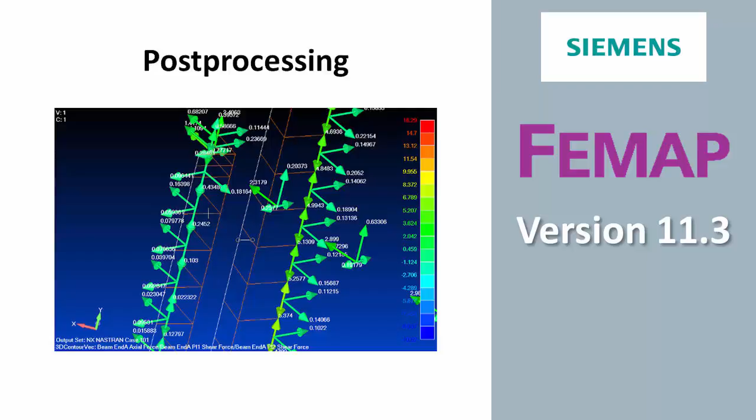Welcome to the Femap version 11.3 What's New video series.

Post-processing. We did a complete overhaul of what we now call our arrow plots. They used to be called contour vector plots, which was kind of confusing because we had contour plots and we had data output vectors. They really didn't have anything to do with each other. We were making arrows, so we now call them arrow plots.

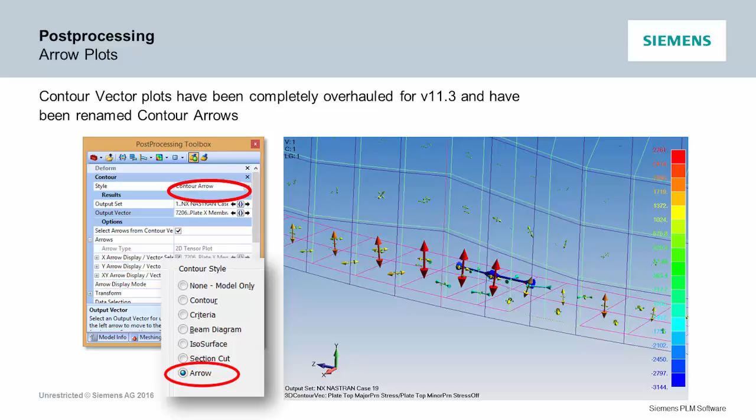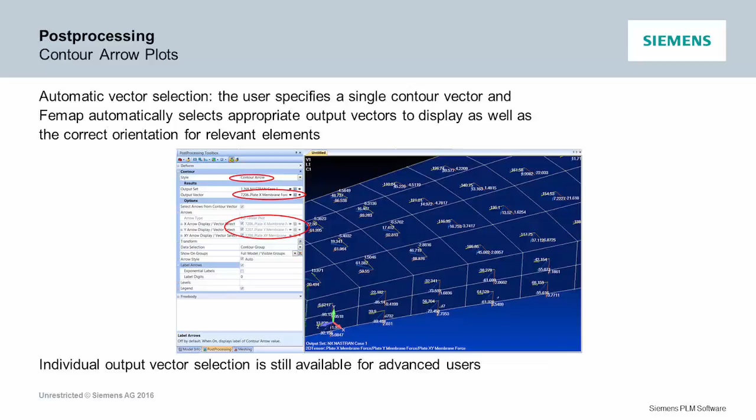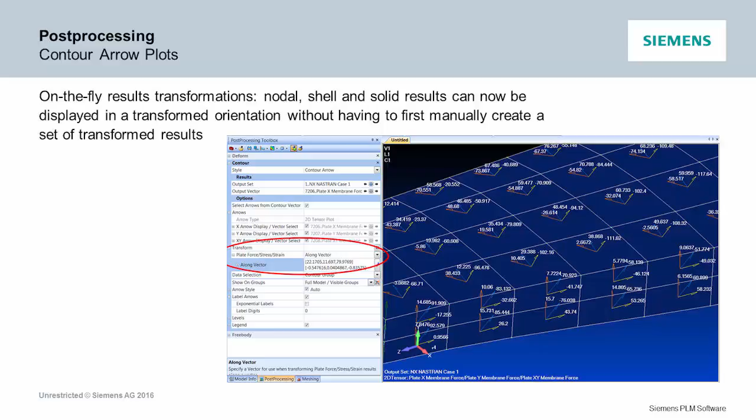And we set this up so that when you pick membrane forces, when you pick X, Y, or shear, it automatically goes and gets the other components and plots them at one time. It just does it for you. Don't worry about it. If you then press the transform button, it just transforms them. You don't have to go set up a bunch of stuff. It's so easy now to make a force plot, transform it in any coordinate system, see it on screen. It changes the arrows to something that makes sense.

It does the same thing if you're plotting principal stresses. It automatically switches to center arrows. It shows tension and compression. You can see what direction they are. And if you pick major stresses, it automatically picks the minor stress. But if you want to turn one of them off, you just turn it off and you'll see one at a time.

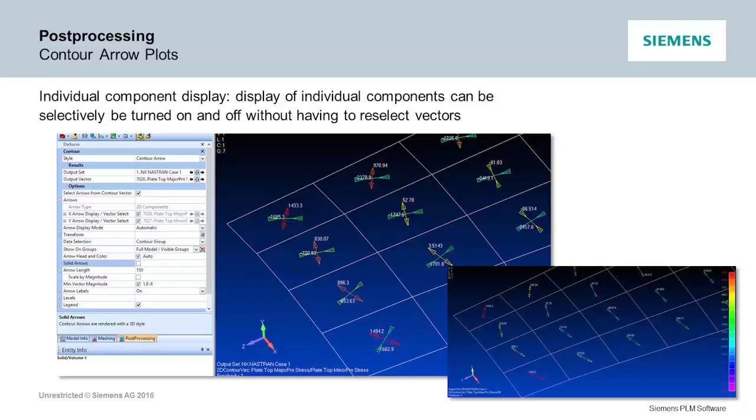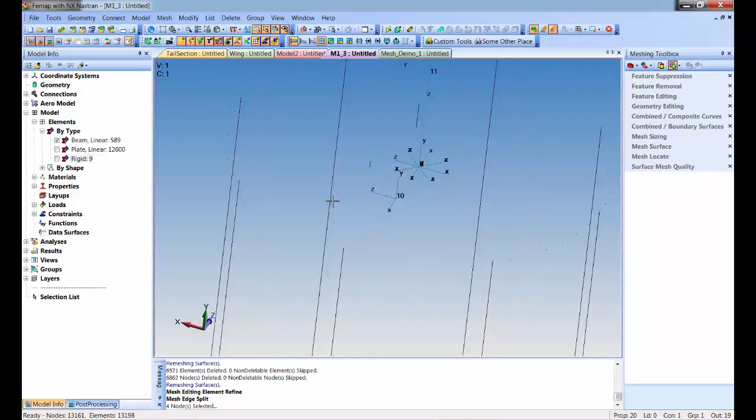There's also solid arrows if you want to make it look pretty, but those are options, and they do look pretty nice. It kind of demos better than it shows. Let's just do some beam ones real quick. I'm going to shut off everything but my beam elements in this model. You can barely see them, there's little stiffeners running vertically, but there's little fasteners running this way.

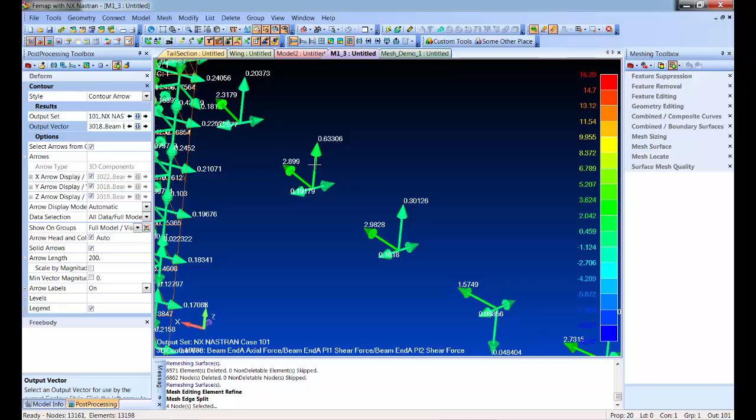So if I go into the arrow plot and pick shear force on a beam, it automatically goes and draws all my beams. So you'll see tension on that little fastener. Here's its shear components. And the bigger one, same thing. You'll see tension and shear. Another nice thing you can do in here: I know that shear is YZ. I can combine those at the same time into their total shear without having to do any output calculations.

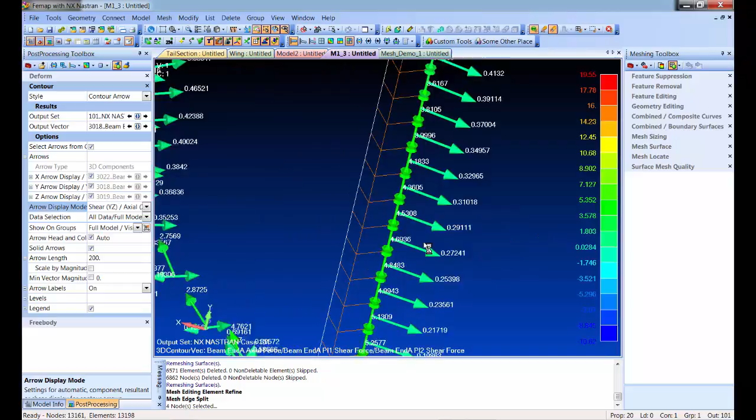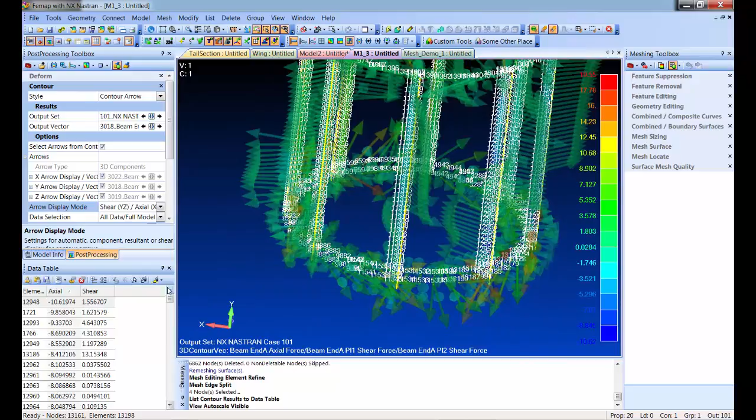And just like everything else in Femap, I'm going to turn on my data table and say list output contoured results to the data table, and now I can sort. And if I turn on the highlighter and highlight, it'll show me the highest axial force in the model in this case.

Or if I change this to shear, I can go find the highest shear value is right here on this element. So it shows me the element ID. I can see the max shear. I can quickly tell what's the highest shear load in a fastener in this entire thing right here.

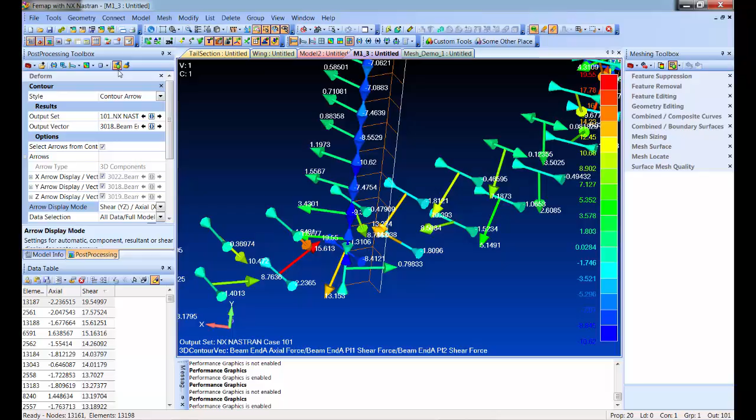I'm running in performance graphics right now, and performance graphics is a little better because it draws the little arrows faster. That's all taken care of. A lot of things, if we can't draw it in performance graphics now, internally it falls through and draws it with the old graphics. So you can pretty much stay in performance graphics right now.

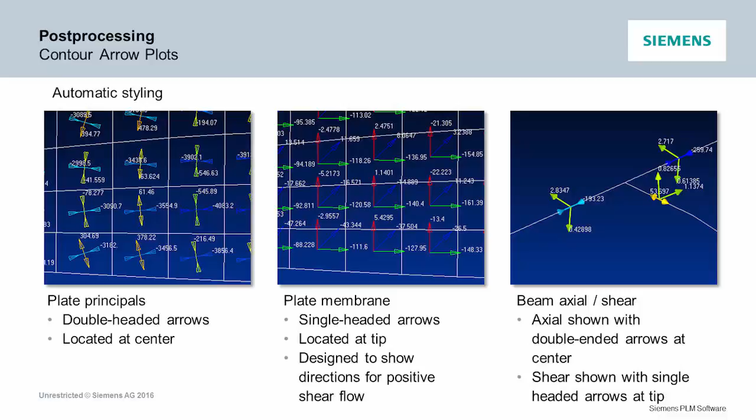Beams you saw, but this also works for bushings. So if you've got a bunch of CBUSHes, you can now see the forces in the CBUSH at the same time. And even simple displacements will draw with these new arrows, and then you can transform or do whatever you want. And we saw the listings, you can do the sorting and all that.

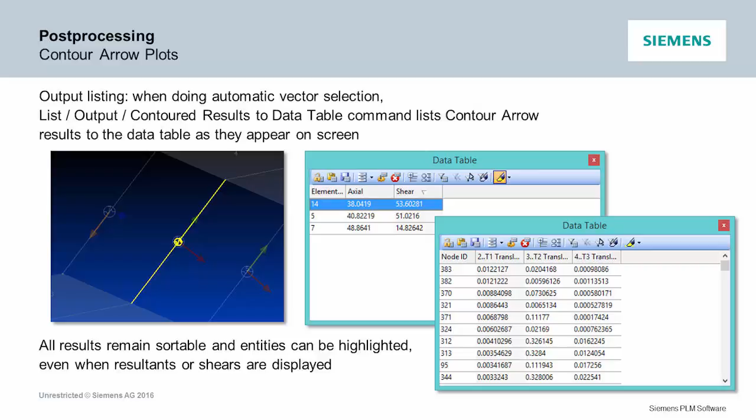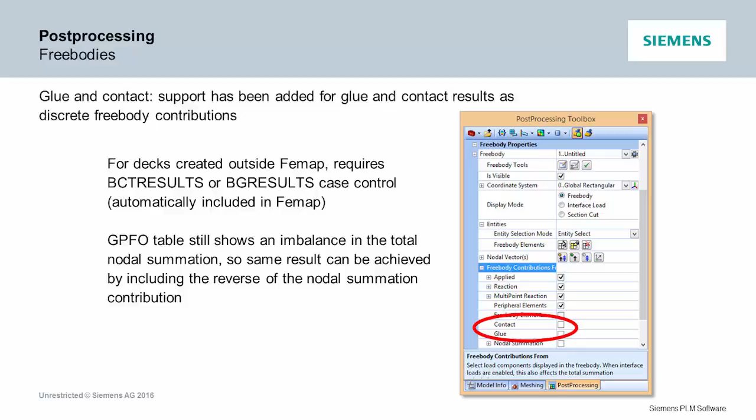Some free body enhancements. In Nastran, there have been some issues over the years; I think glue forces were backwards in the grid point force balance. So Femap took care of it. We would recognize it as backwards, flip it, and your things would all still be balanced. They fixed some of those, so now you don't need to turn them on and off and do any flipping. So things are squared up on free bodies.

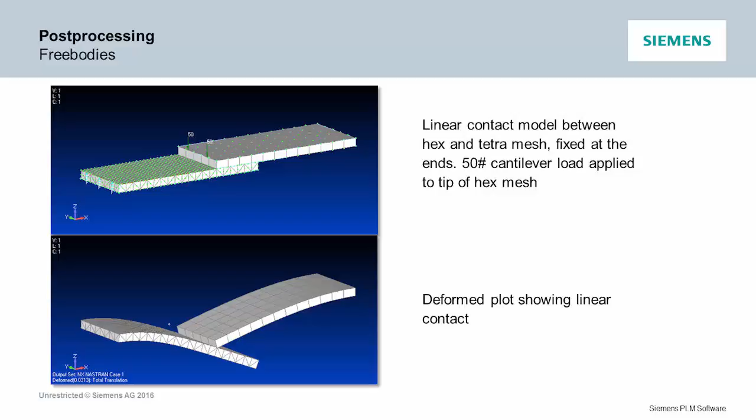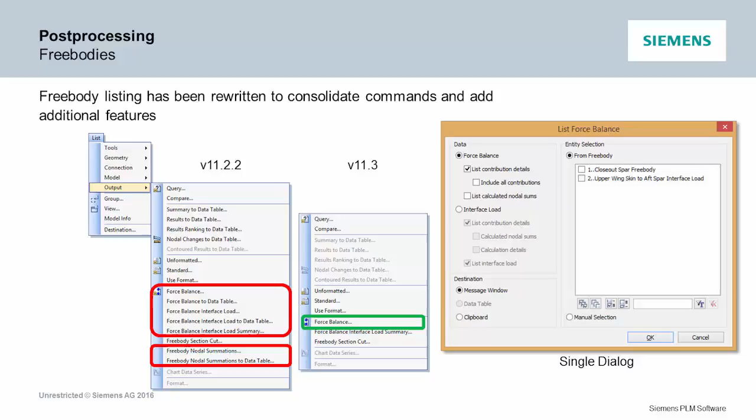But with linear contact now, all the free body stuff is in the Nastran results file, and you can see total forces across joints and whatever you want to do with free bodies. Some new listing options. We've consolidated what used to be all these different commands into one nice box. You can list your free body data much easier. And besides the window, you can automatically send it to the clipboard or the data table, which is nice when you're messing with free body forces.

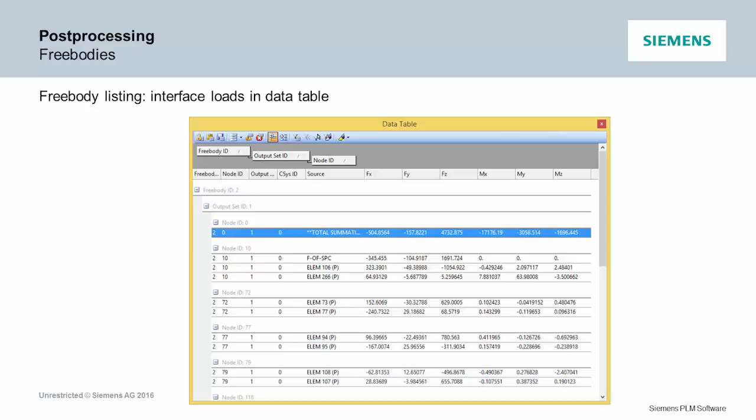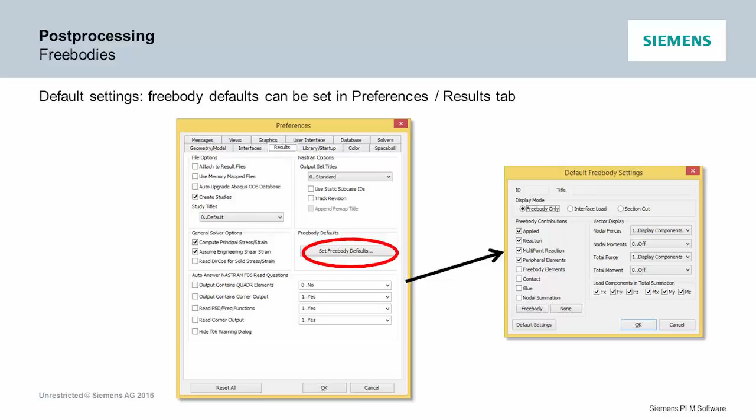And the listing, when it's going to the data table, actually mimics the F06 file. So anyone that's used to looking in the Nastran printed results for grid point force balance, Femap will now spit out the same thing to cut and paste. When you set up any new free body, the defaults are usually the right ones, but if there's something special you do, you can now set the default so each time you create a free body, it gets the ones you want.

A small usability enhancement. We've got charting in Femap. We completely rewrote it in 11.2. It's really nice. But if you had 1,000 transient output sets and you're plotting an acceleration of a node, you used to create a chart, create a data series, tell it what you wanted it to be, go from 1 to 1,000, and then finally pick a node.

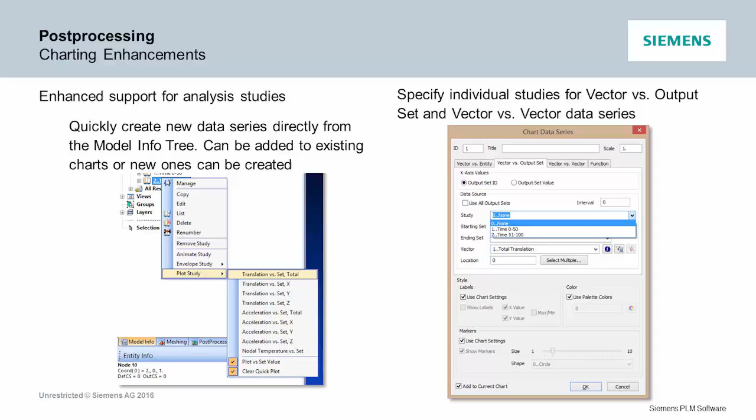Now on the studies in the tree, you pick the transient study, right-click, and say I want to do a Z acceleration plot. It asks you for the node and makes the plot. You can pick 50 nodes, whatever you pick. It makes it all in one instant shot. We added translations, accelerations, and temperatures. For most people, we thought that would be what they wanted to do.